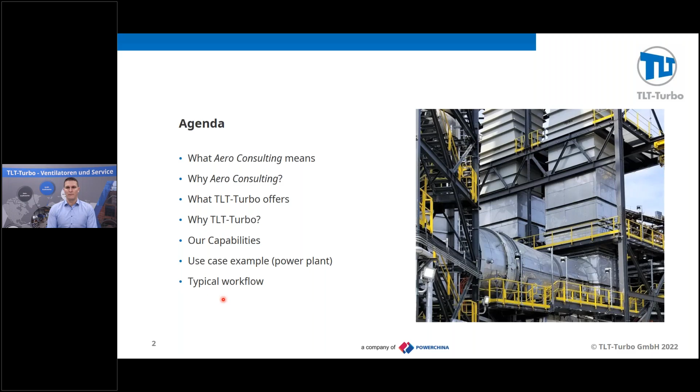So let's start. What does Aero Consulting mean to TLT? We strive for a holistic approach and do a holistic analysis, consulting you on all the aerodynamic topics, especially for industrial plants with fans, because we as a fan manufacturer know very much about fans and fan aerodynamics.

The main goal is always to identify potential improvements in your plant, with a focus on energy savings, which correlates with cost savings in your pocket. Fan reliability improvement is also an important goal. We strive to propose a solution that is easy to implement and with rather low costs, so that you have a short payback period and a short return on investment.

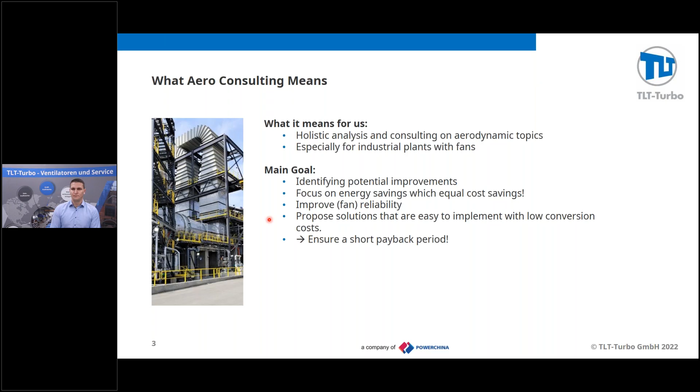Why Aero Consulting? Improved performance is correlated directly, in our opinion, with cost savings. So you can either get higher energy yield if you improve, for example, fan efficiency, or you have a higher yield with lower energy input power.

Typically this can be achieved via three different things. First is reduction of system pressure losses — every pressure loss reduced in your plant correlates with shaft power savings. We can also look at the operational mode of the fan and try to optimize that. And last but not least, we can optimize the fan itself.

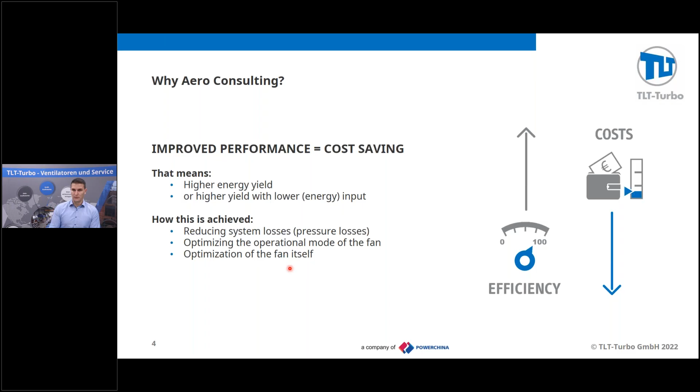So what does TLT offer here? We start with the analysis of your current situation, of the current operational situation. How does the ductwork look? How do the fans operate?

We can do an optimization of the flow and the fan. We could start here with an on-site measurement, so our experienced field service teams come to your plant and perform on-site measurements in order to get, for example, the current operational conditions of the fan.

We can also do analytical calculations, CFD calculations, and we have the capability of conducting full-size measurements or model measurements in our test facilities. Last but not least, if some measures have been implemented, we can validate them with in situ performance measurements. We also have experienced engineers and a field service team who can help you execute the improvements on site.

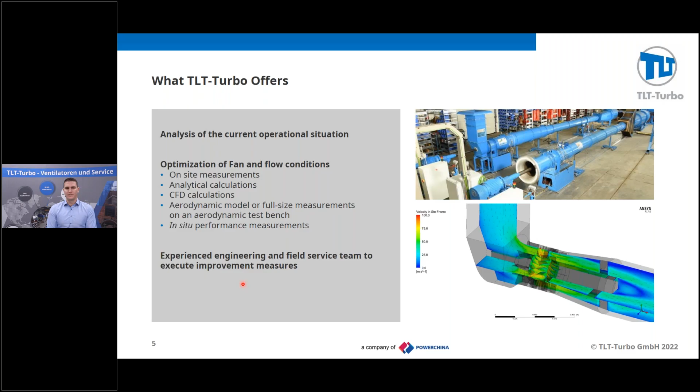So why is it now a good idea to do Aero Consulting with TLT-Turbo? I think you may have heard of CFD suppliers, CFD consultants. There are lots of them on the market. So why TLT? I think I mentioned it several times now.

We strive to take a holistic approach here. So we are not only a CFD supplier or consultant, but we are also an experienced manufacturer of fans and the related ductwork. So we go beyond this CFD consultant, and of course we have a competent aerodynamic specialist team and a field service team who can help support you in the execution of possible improvements on site in your plant.

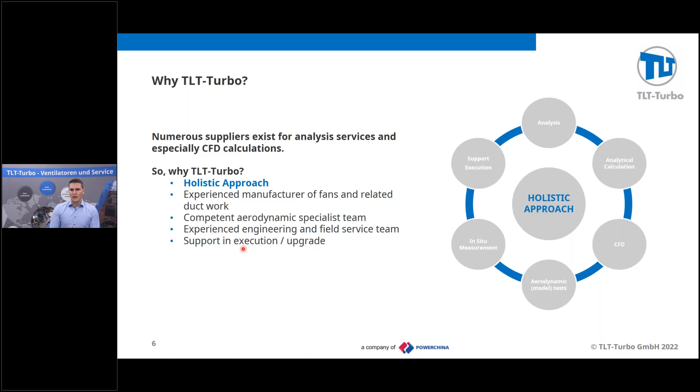Okay, now I would like you to participate in a small survey. This should appear now on the screen in a moment, so that we get an idea of some Aero Consulting questions. So the first question is: do you think energy savings are possible in your facility? And if yes, in what order of magnitude?

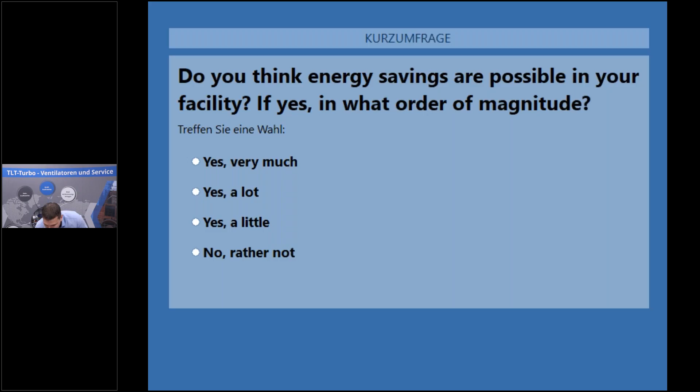So we would appreciate if you participate. Okay, the answers are popping in. So most of you think that there might be possible energy savings. Only 8% think no, rather not. But that's good news for TLT.

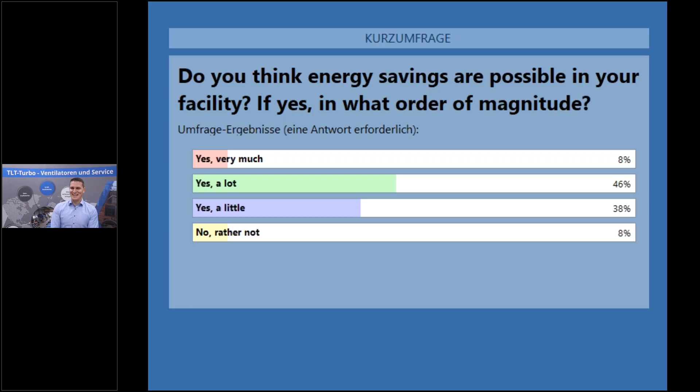Next question is: by when do you want or need to save energy, for example due to some mandated legislation?

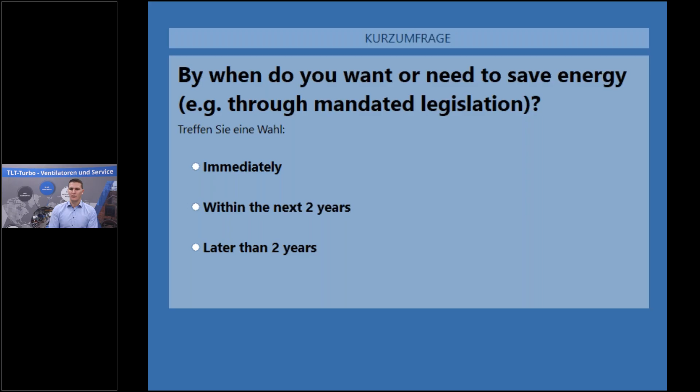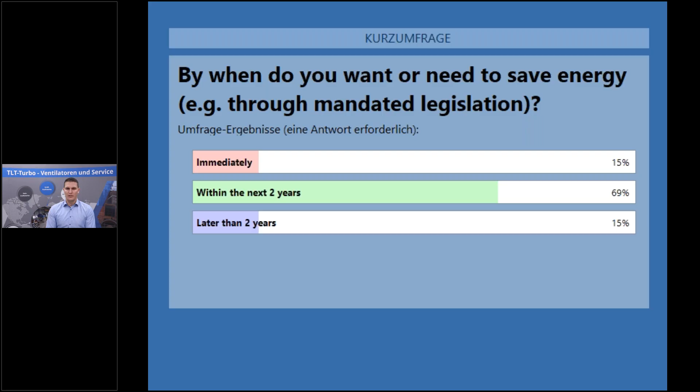Okay, so similar to the first question, there might be some work needed in the near future. So immediately, or almost 70% within the next 2 years. That shows us, so thank you very much for participating here, that this topic is a current and crucial one. And I will have another question just in a few minutes, so thank you very much so far.

I would like to proceed now and give you an overview of our capabilities. Of course, CFD is a huge part here, so I'll give you an overview. On the left hand side, on the bottom, you see two pictures where there's a comparison of two ducts connected to two fans on the pressure side in a power plant. So induced draft fans, I think it was. And the customer had asked us to analyze the flow conditions in the duct using CFD as well as to reduce pressure losses if possible.

Unfortunately, it must be said that we did not have very many degrees of freedom to change the duct, because lots of the work had been done already. But nevertheless, we managed to reduce the pressure losses in the short piece of duct by about 120 Pascal. This resulted, at this operating point, in about 175 kilowatts less drive power.

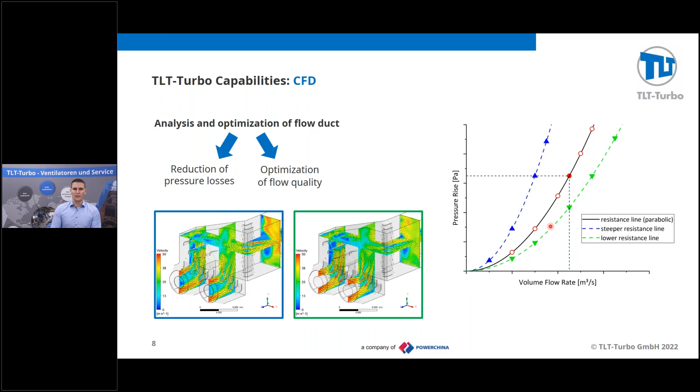Okay, another topic where we use CFD: you see an example where we were asked by a customer to exchange the impeller of a centrifugal fan, because the customer was asking for 20% higher pressure rise. So we performed a CFD calculation of our TLT rotor in an existing foreign fan housing, and we could achieve this 20% higher pressure, and efficiency should not drop. That was also fulfilled, if not a little bit better at the end.

So that's another topic where we use CFD.

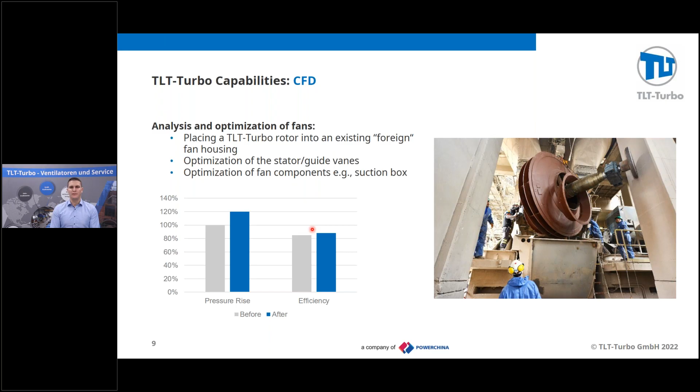We are also using it for optimizing or simulating the flow inside the fan stage, so rotor and stator or guide vanes, or the components which belong to the fan, such as the suction box. On the right hand side, you see a before and after plot of the inflow conditions to the fan blades after the flow was flowing through the suction box. This improvement does not only improve the pressure loss of the suction box, but also improves the inflow conditions to the blade, so the blades can work as they should.

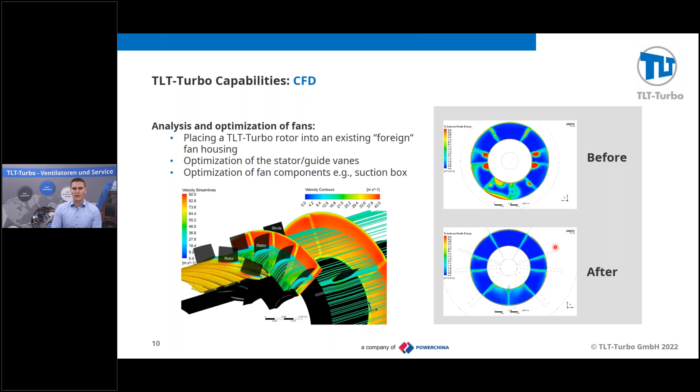Now I would like to present some special calculations to improve reliability. We were asked to have a look at a bearing and the heat transfer on it, so we performed fluid structure coupling to simulate the heat transfer. Here you can see the two bearings which produce heat, and the task was to find out whether they got too hot or not, and how we could cool them directly or indirectly. On the right hand side, we are also capable of predicting where erosion may be a factor in the centrifugal impeller, and where it's necessary to put some wear protection on the plates.

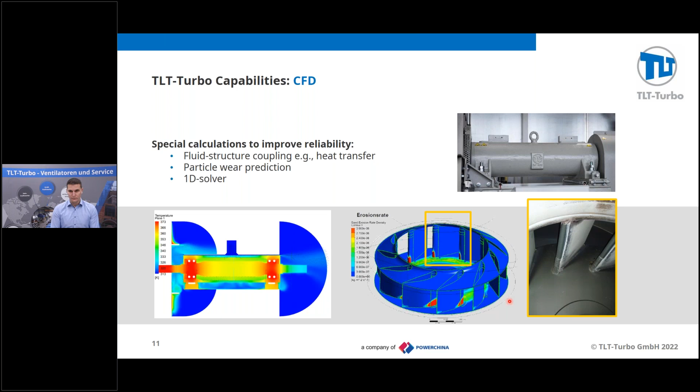Another important thing is we have a 1D solver, with which we can simulate the flow and thermal behavior of your system. We can also optimize the operational modes of fans in the system.

Here on the bottom, you see a picture where we have 6 fans running in parallel mode, and that may cause some problems, especially during the startup phase.

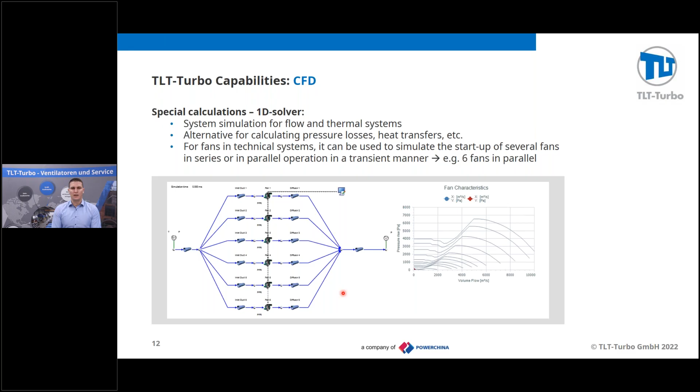To make it not that complicated, I would like to show you a short video of a transient simulation. So here we have not 6 but 2 fans running in parallel, and on the right hand side you see the characteristic diagram of the fans. It's 2 similar fans, volume flow and pressure rise, and these different curves represent different fan speeds. Now you see there's a blue and a red dot, representing the operating conditions of fan 1 and fan 2.

We simulated what happens if, for example, one fan, in this case the red one, is ramping up not simultaneously with the blue one. Unfortunately, it is now in stall conditions, which is not a stable and wanted condition for the fan, whereas the blue one is operating as it should. This should be avoided, of course, so some adjustments are made with respect to speed in order to get the red fan out of the stall condition, and now they are more or less simultaneously ramping up. With this simulation, we could get an idea of the issues caused by ramping up 2 fans running in parallel mode, and how problems could be solved.

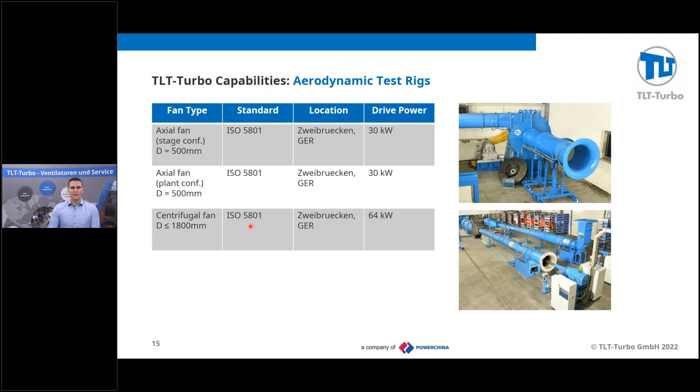Next slide, we are getting a little bit bigger now. We have another test stand here for axial fans in the power plant configuration, shown with a drive power up to 355 kilowatts, and the diameter of the fan is 1 meter. That's now in accordance with the American standard 210.

Then we have also full-size performance test stands here for axial and centrifugal fans in Bad Hersfeld, in Germany, in accordance with the 5801 standard, and drive power is 500 and 400 kilowatts respectively.

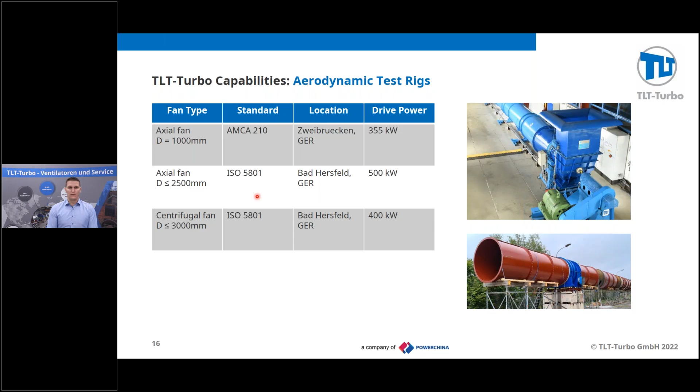Last but not least, we also have in Akron, Ohio, in the United States, a full-size performance test stand where we can test axial fans up to a diameter of 2.5 meters, and the drive power is here 400 kilowatts.

The biggest one is here in China, in Chengdu, where the motor has a rated power of 6 megawatts, and we can perform aerodynamic tests for axial fans with a diameter up to 5 meters, basically to every standard you're looking for.

And should also be mentioned, the jet fan test stand here in Zweibruecken, where we can test jet fans.

So of course these test stands are a good option not only during the optimization phase, but also to validate the results. For example, if we optimize the fan, we can show and prove to you the aerodynamic improvements with some model measurements.

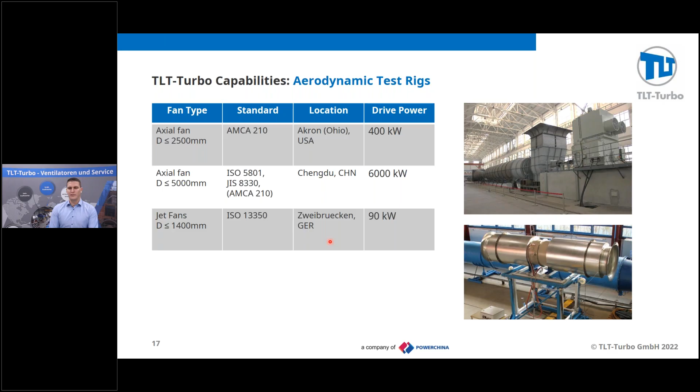Okay, now it's time to show you a current use case. So we did a retrofit of the exhaust gas fans here in a power plant in Germany.

The operating conditions of the fans have changed, and the initial design operating points have changed. So the operating points in the performance diagram are now located in areas with bad efficiency. So we did an aerodynamic optimization of the fan, adapted it, and figured out how to improve the efficiency values of the operating points by optimizing the fan.

The results have been, depending on the operating point of course, that we could reduce the power consumption by quite a bit - from 460 kilowatts up to almost 1 megawatt in shaft power savings.

And depending now on the energy price you calculate, and of course the proportion of operating hours in each operating point, that could be 200,000 up to 450,000 euros a year.

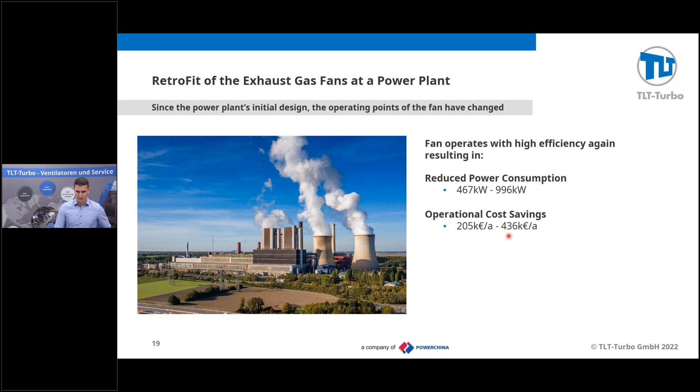Before I show you what we did, let's have a look at some data of the fans. Once again, it was a coal-fired power plant here in Germany, and last year we did an aerodynamical optimization of these two fans because they had new operating points.

One ID fan, or each ID fan, had a diameter of 4.7 meters and 11 megawatts drive power. Each fan consists of 2 stages with 22 blades and 31 guide vanes at each stage.

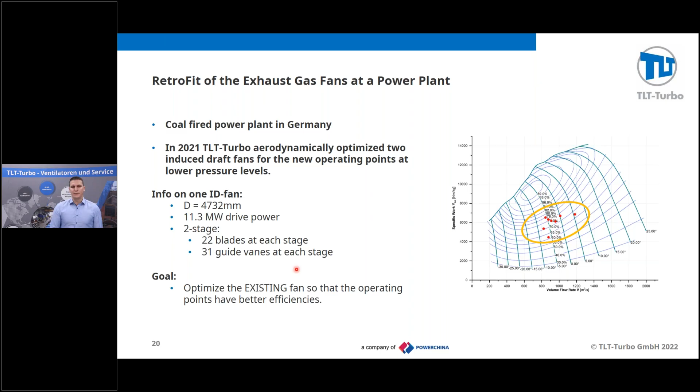And now the goal was, of course, to optimize the fan so that the operating points have better efficiency and the customer is saving energy and therefore some money.

The boundary conditions were, of course, quite challenging because the fan must remain - we could not replace the fan. So the outer shell at least should remain the same, as well as the rotor, and modification costs should be as low as possible so that the execution could be easily done within a regular maintenance stop.

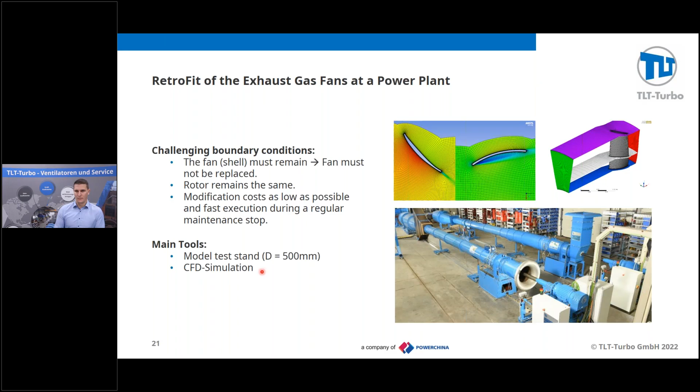And our tools here were the model test stand I just presented to you, and of course CFD simulation. So we started with the first step.

Due to the reduced operating points with respect to pressure rise, what is the first thing you normally do to the fan in order to get a lower pressure rise? You can remove some blades. So we carried out several model measurements with different variants by reducing the pressure increase here.

And now, by cutting the number of blades in half, the pressure significantly dropped. But as you can see here on the far right-hand side, there's at least one operating point which cannot be operated because it's above the stall line, and overall the efficiency values and the shape of the characteristic diagram are not very nice and suitable.

So we had to perform an optimization of the guide vanes.

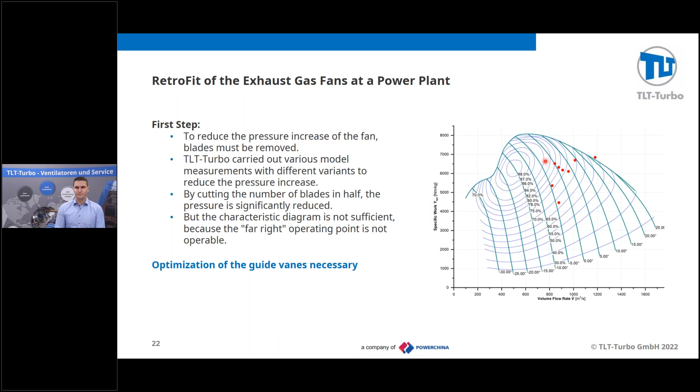So the second step was now CFD related. You can see here on the right hand side, that's the section through the rotor blade, and that's a section through the guide vane. You see here the poor inflow conditions and flow conditions around the guide vanes.

There's a huge flow separation, which causes pressure losses and efficiency reduction. So we did different guide vane variants, with different numbers. Finally, we cut the number of guide vanes in half, reducing from 31 guide vanes to 16. We also had to adjust the leading edge angle so that the flow conditions were improved.

The advantage is, of course, the guide vanes can be cut out of the fan housing quite easily, and the same applies for the modifications on the leading edge of the guide vanes.

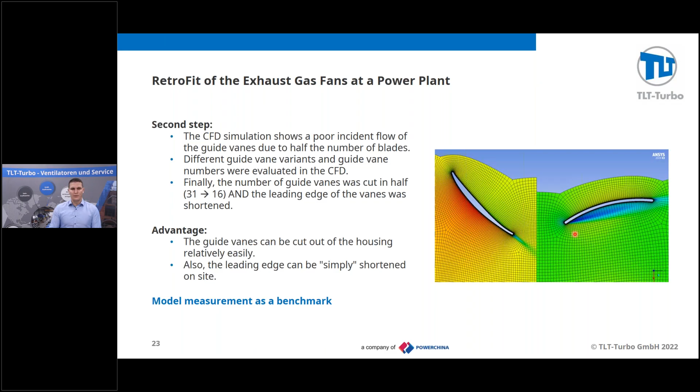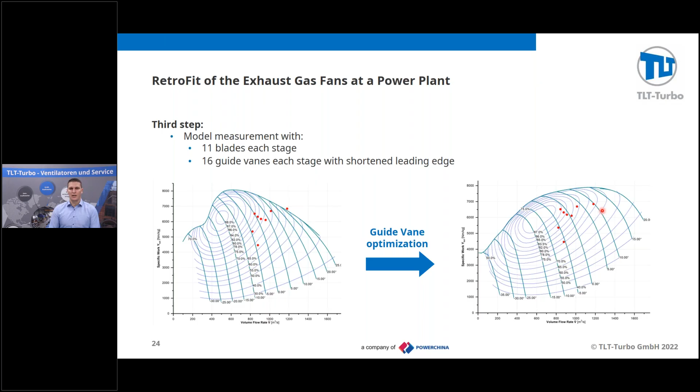Now the last and third step was a benchmark measurement at our model test rig. So we came here with reduced blades, did the guide vane optimization, and could catch this operating point here on the far right. All operating points can now be operated in a stable mode, and efficiency compared to the original fan configuration was improved. I'll show you that on the next slide.

So we started here with 2 times 22 blades and 31 guide vanes, and we ended up with 2 times 11 blades and 16 guide vanes. But not only did we reduce the number of guide vanes, we also adjusted the guide vanes at the leading edge.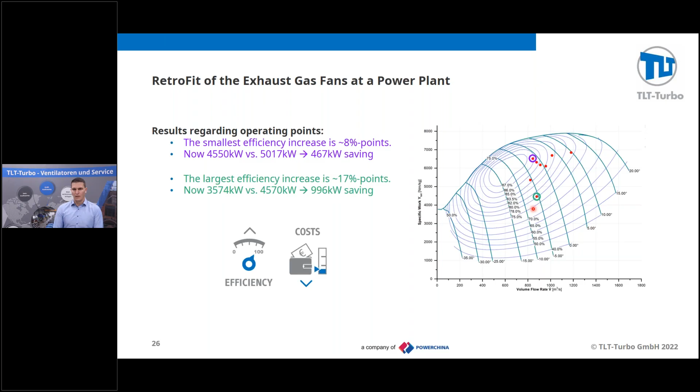So assuming for these 2 operating points, the green and the purple one, only 200 euros per megawatt hour, and if you assume, for example, 25% load proportion in that operating point, you would result in 200,000 euros savings a year for the purple operating point, and for the green one, more than 430,000 euros.

You can do your own math, of course, assuming another price for energy costs or another proportion of operating hours per year in this operating point, and you will result in the money savings per year accordingly.

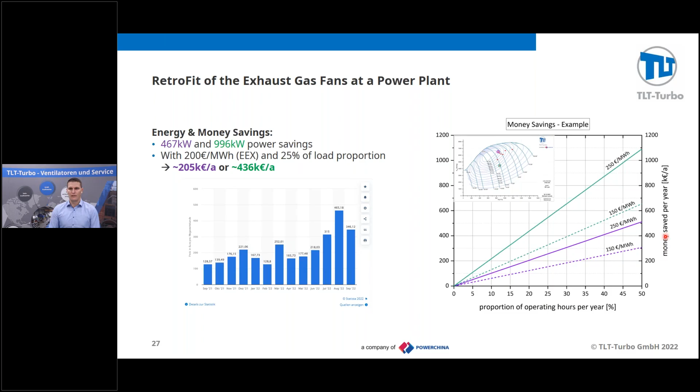Okay, last but not least, I would like to show you how a normal or typical workflow would look like if you would like to proceed with us in respect to aerodynamic consulting.